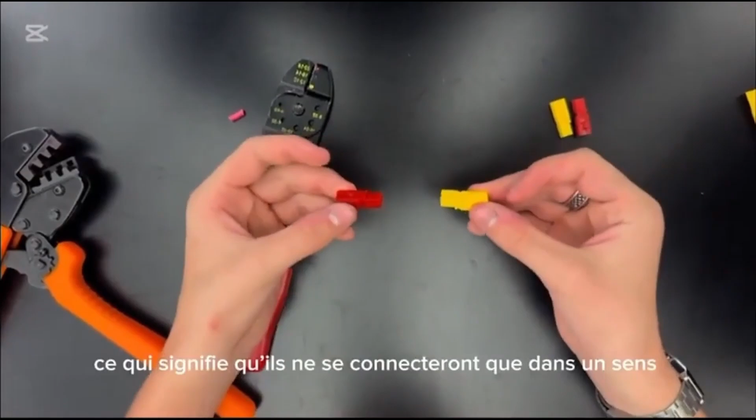Anderson connectors are designed for polarized use, meaning they'll only connect one way, which prevents reverse polarity. To disconnect, simply pull apart the connector. With this quick connect mechanism, they're as easy to disconnect as they are to connect.

Traditional connectors can be unreliable due to loose connections, corrosion, and weak materials, often leading to overheating or power failure. Especially in high-demand applications, these connectors can't always handle frequent disconnects and reconnects, making them less durable over time, and just really annoying to connect.

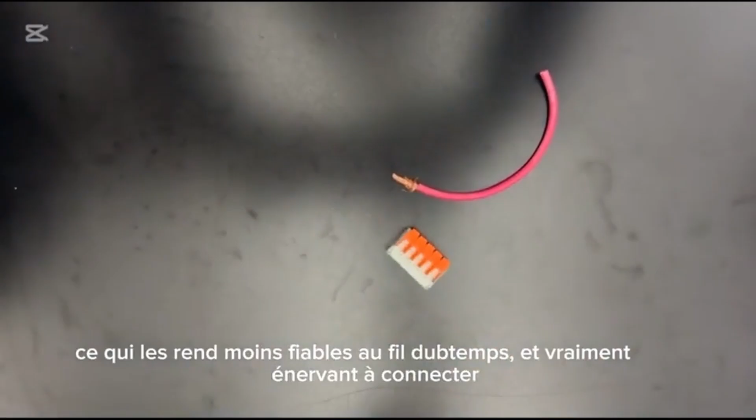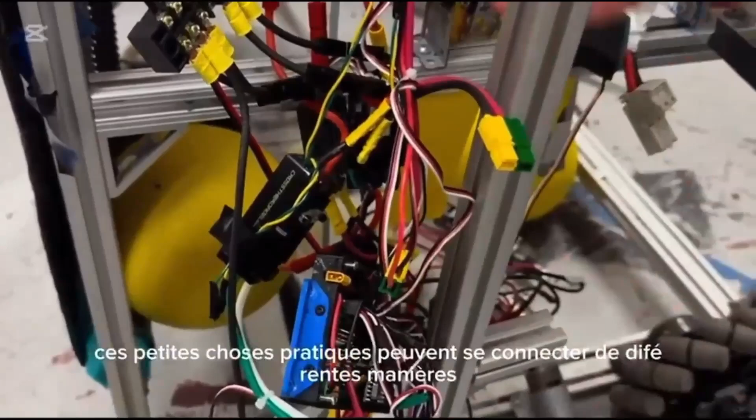Ever since I joined Robotics 3 years ago, we've had a big issue with connectors. We've used almost every single kind of connector. That was up until last year when we discovered Anderson connectors. These handy little things can connect many different ways, and we used them for the whole robot last year. Anderson connectors were great because they were reliable. The only issue we had with electrical portions were when we didn't use Anderson connectors.

Use Anderson connectors! Use Anderson connectors! Say it, Andreas. Use Anderson connectors!

Hello there! Some of you might not know certain aspects and details of filmmaking. Some of you might even ask, but Crazy Dave, how can I create a good story with my camera? Do not fret, let me show you.

Before we can start filming, we have to consider form, content, and concept, or FCC. Form is the artistic choice, such as the technique of the framing, color, and aesthetic. Another technique of form is cinematography. To portray a specific situation in the story, we use different camera angles.

This is basically how you film using the camera, and there are different types of shots. A certain camera distance can say a lot about the situation and its message. An extreme close-up of a person's eye, which is a very narrow view, can portray an intense emotion when they see a zombie and they're in a freezing moment of fear.

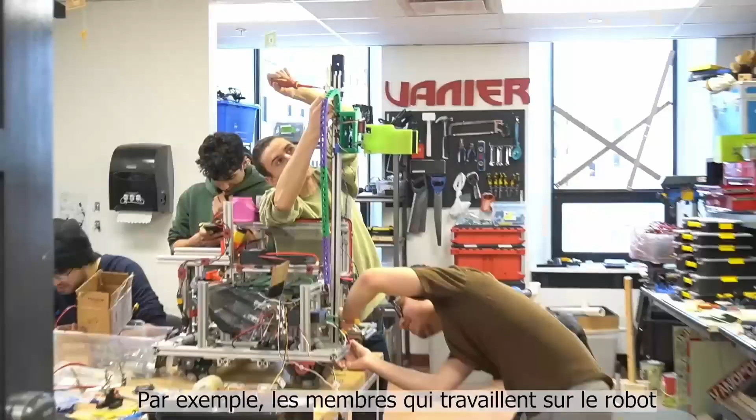A medium shot is a subject shown from waist up. For example, members working on the robot can demonstrate what they are currently doing. A long shot is a wide view of the surroundings in which the characters are in.

A low angle is when the camera is positioned below the character. This shows a certain dominance. A high angle, in contrast to the low angle, is positioned above the character and minimizes them. And why not add the Dutch angle for fun?

Content is the elements in the film like subject or characters, objects, and much more. For example, to portray our theme Plants vs. Zombies, we add props and animation to enhance our theme by using characters from the mobile game, such as Crazy Dave, plants, zombies, and portals. This is all the content.

This example comes into play with mise en scène, everything placed in front of the camera. What kind of setting do you want? This is everything we see in frame, such as costumes, makeup, character expressions, their behavior and their movements, and also the lighting and the color palette.

Lastly, the concept is basically how you would like to convey the main message and story to your audience. These will help convey a clear idea or message to the audience and avoid random aspects. The mise en scène portrays the message of the theme.

In the situation where zombies are after people, you'd want your actors to act fearful and shaking a bit. Maybe not jumping around in joy and laughing, because realistically, they're not surviving the apocalypse. Although, if you had horses in front of the camera, I don't think it's a good representation of the theme.

Wow, thank you. I feel cleansed. Wait a second, where did all the stuff go? It's on your beautiful pegboard, you see. Each thing is labeled, clear as can be. So make sure to put things back in their place, to keep everything organized and save some space.

Please note, Royal West Robotics did not put everything back in its place, and it caused a lot of chaos.

Okay, Robotlings, gather round today. Let's talk about what we've learned, okay? Here's my final piece of advice to say. Have small check-ins to keep track of your day. See what you've done and set new goals ahead. Write down your progress and what's been said. Note setbacks and wins in a tool online. It helps keep you accountable and helps you shine.

In today's tutorial, I will show you how to sew costumes.

Your first question is probably, what is the link between costumes and robotics? We all know that in order to have a good kiosk, you need to have the most interactive theme possible. So costumes really help you achieve that. Additionally, it helps people who are discovering the CRC competition for the first time identify you and your team members.

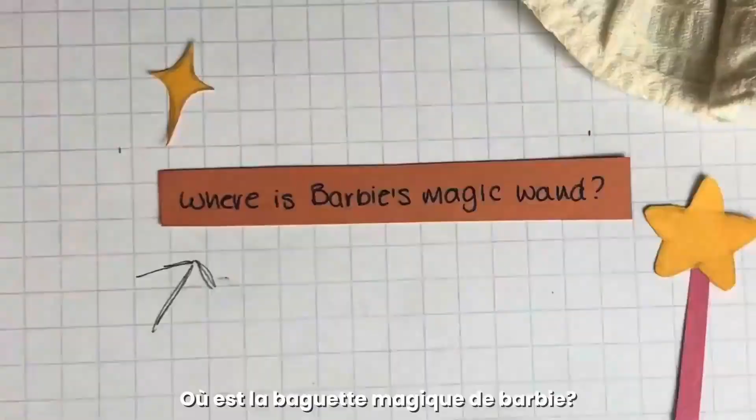That's a lot of questions. Let's dive into the fabulous world of shooters!

First up, catapults. They are powerful mechanical devices that use stored energy to launch objects. Now let's talk about catapult mechanisms, because just like shoes, they have different styles.

The three main types are the winch, the slip gear, and the choo-choo. The choo-choo, it's a cute name, right? It actually comes from trains because it works like a train's mechanism.

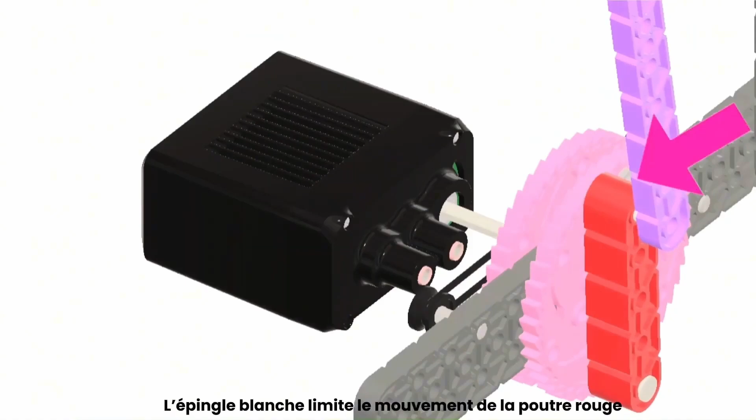In this animation, the motor turns the pink gear that pulls the red beam. The white pin restricts the motion of the red beam, and the latter pulls on the purple beam. When the white pin releases the red beam, the catapult is launched. The ratchet blocks the rotation of the mechanism in the other direction, relieving the motor and preventing it from overheating.

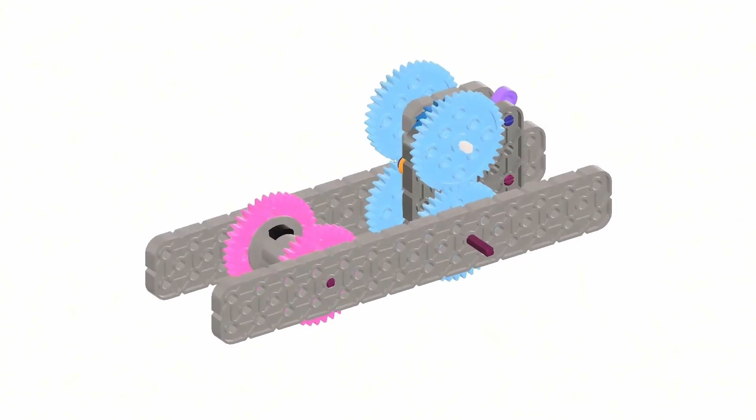Next up, the winch mechanism is a simple yet powerful tool for launching objects. When the motor turns, it engages the blue gear with the pink one, which winds a rope pulling the launcher down.

The ratchet on the blue gear holds the launcher in place, which relieves the motor and keeps it from overheating.

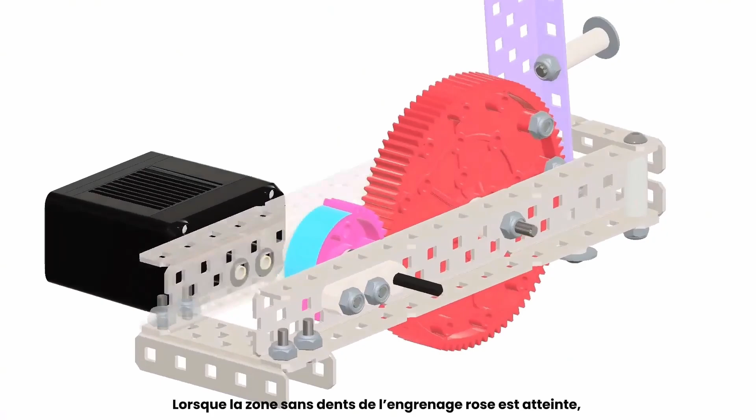The slip gear mechanism is pretty self-explanatory. It's a type of gear designed intentionally with missing teeth. The motor turns the slip gear, which turns the red gear holding the launcher. When the area with the missing teeth is reached, the red gear will slip, releasing the launcher. A ratchet helps hold the launcher, preventing the motor from overheating.

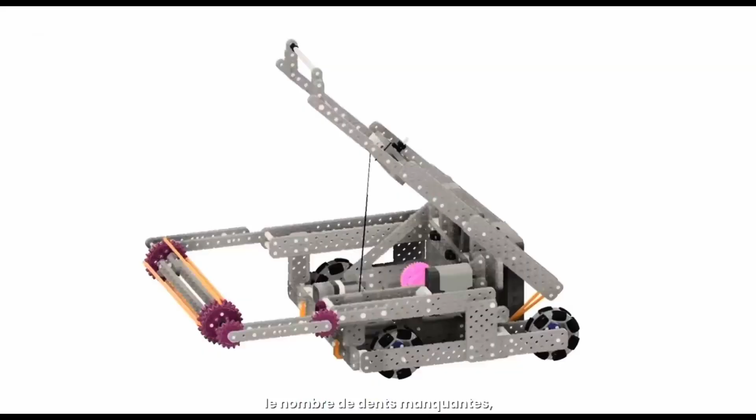Out of those three mechanisms, the winch is the most versatile because a launcher can be lowered and retained at any desired position. With the choo-choo and the slip gear mechanisms, the position of the launcher is dictated by the sizes of the assembled parts, like the sizes of the gears, the number of missing teeth on the gears, and the length of the arms.

Flywheels are also great launching devices. They can launch projectiles accurately over large distances. They work best when the objects are round, like balls or discs. They're not ideal when multiple objects need to be launched at the same time. However, catapults can, especially over short distances.

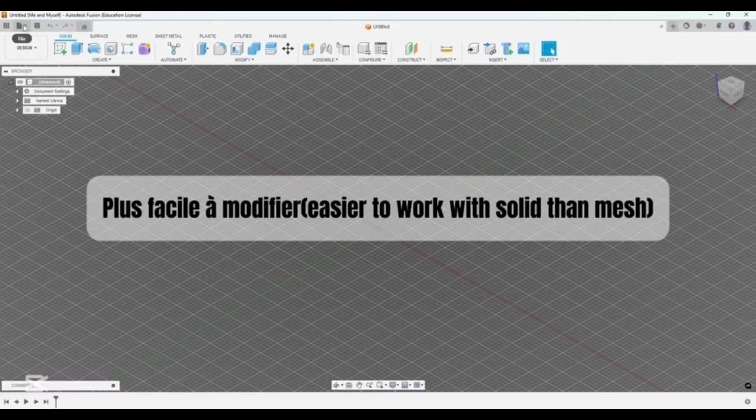Transforming a mesh file into a solid in Fusion allows you to easily work with the object that you want to convert. This is especially useful for remixing online files.

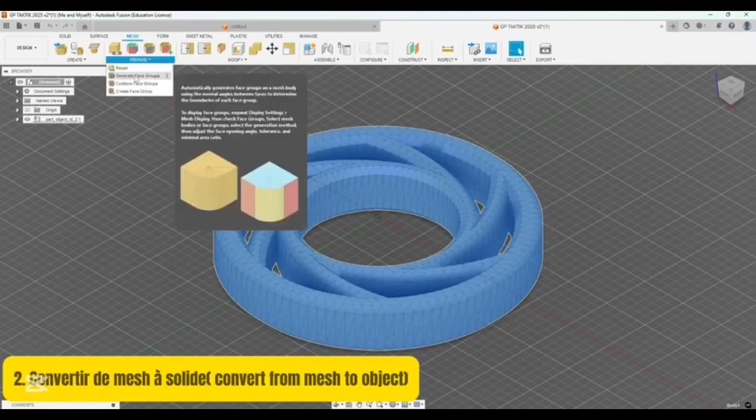In this state, the file will not convert properly. To eliminate the triangles, you need to group them into faces, which will tell the program how to convert it into a solid.

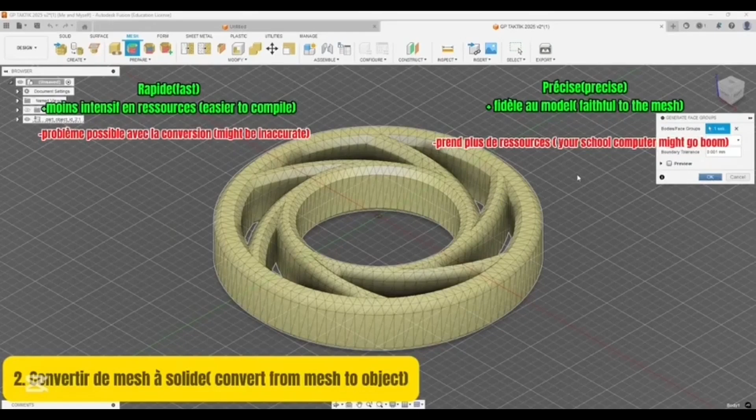This function allows us to decide between fast and accurate settings. The main difference is that accurate stays true to the mesh, while fast might cause some issues during the conversion but saves system resources. For this demo, I will go with accuracy.

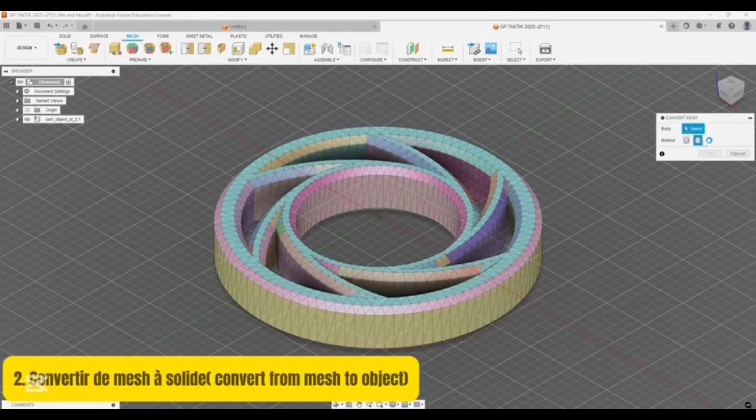Once the menu is open, you can select the prismatic option, which will get rid of the triangles, and you just have to select your object and click OK. The rest will be done automatically.